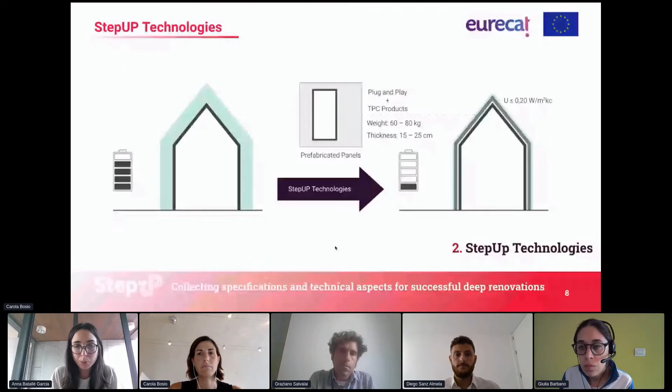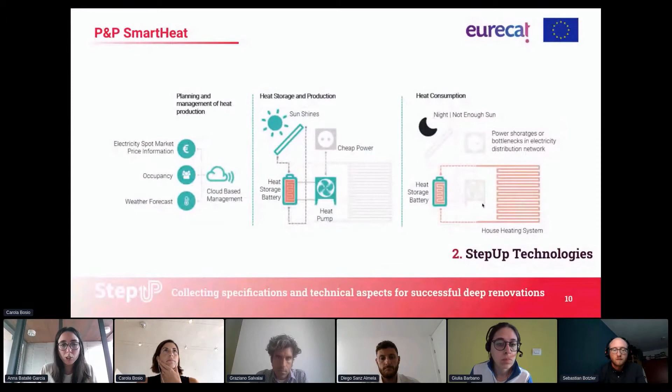So smart heat is a heat storage battery. What it does is store energy during the day when we can produce energy on site, and then it releases this energy when demand on energy consumption increases and there's no on-site production. In the following slide we can visualize a little bit what this storage looks like and how the PCMs are integrated within this storage.

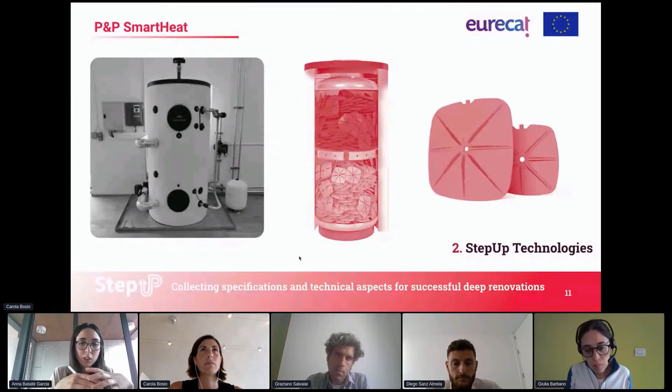So one of our goals is to provide a fully renovation package. In order to complement our main technologies, we need to collaborate with third-party technologies. For the passive technologies, this would mean having the external layer components, the windows and solar protections provided by third parties, as well as the PV and ST panels, the heating and cooling systems, and the demand control ventilation.

So what are StepUp principles? These principles need to work as a kind of guideline for the different technologies that are involved in the project for us, but also for the third-party technologies that are going to be involved in the project.

Sorry. Okay, no worries. Sorry, I don't know what happened. It's my fault. You reloaded. Yeah, in the principles. Yes, here. Sorry for that. Yeah.

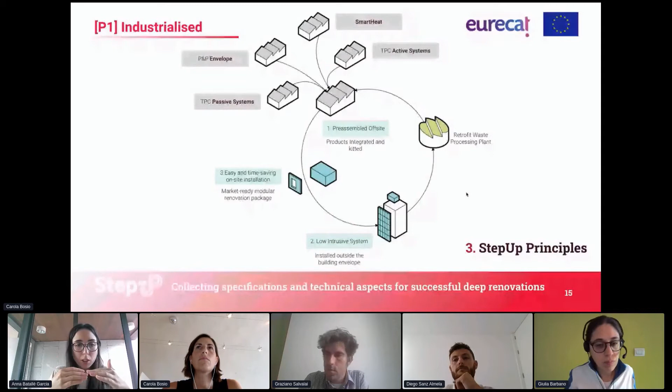So the first principle is that we want an industrialized solution. This means that the solutions need to be pre-assembled off-site in order to minimize the time on site, but also to reduce errors. Having the opportunity of these pre-assembled components will also reduce the impact or disruption we are causing to the users of the building. So it's important that we can prefabricate and have the solutions kitted before bringing them on site.

The solution also needs to be customized. It means that it needs to be able to adapt to different architectural geometries, so to different configurations of buildings, but also to different aesthetics. So we don't have a standard solution for renovation, but solutions that we can adapt and play with in terms of the aesthetics of the building and how it looks in terms of materiality, finishes, etc.

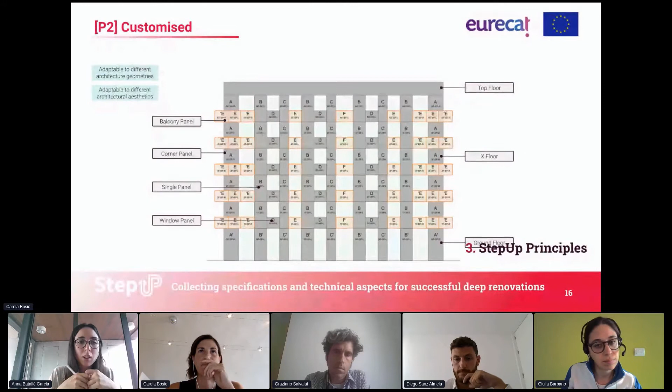Next, as I was mentioning before, it also needs to be compatible and interoperable. So the different technologies need to be able to engage with each other without having to apply major changes, to also ease the process of preparing the kits off-site before bringing them on site and reducing the time.

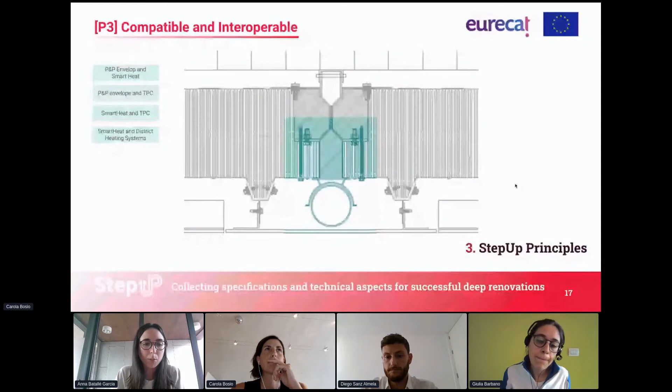We are also considering the impact that our technologies can have on the environment. So we are considering design for disassembly strategies and the impact of the solutions we are working with. So it's not only important the technical development, but also the sustainable benefit that this technology can bring to the market.

For open exchange of information, one of the things we consider most important for our methodologies is to be able to plan the different steps in order to make them efficient. To achieve that, we need to be able to exchange information easily, since there are different collaborators during this process. In order to efficiently exchange our information, we are trying to set up a kind of rule on which kind of information needs to be provided, in which format, etc.

And finally, all the technologies that we are developing need to meet EU regulations, but also in order to be able to understand the environmental impact, etc., we are also asking for environmental certificates.

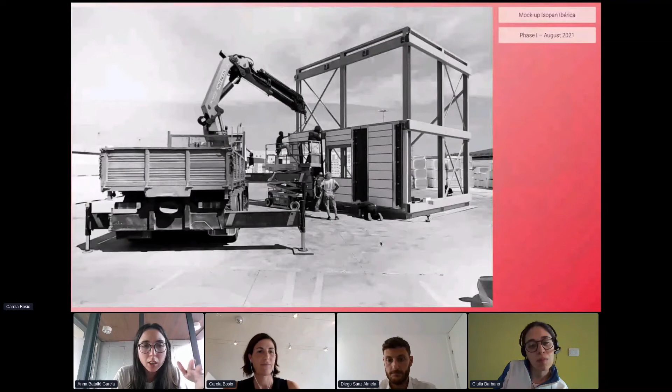Yeah, you have one minute. You tell me if I have to go to just the slide, move. Yeah, I think this is a collaboration. If you move to the next slide. It's better to, maybe do you want to? Yeah, well, this is what I've just said. So you can just move to almost the last one.

So it was mainly saying that we are trying to engage with this third-party cluster of companies, and what we are asking for is some kind of feedback on the process we are developing. What we are offering them is exposure, networking, visibility, the ability to test these technologies, and also to build a network for themselves with other innovation companies trying to change the renovation market.

And finally, in the last page, if you want more information, all the presentation is collected in a booklet that is in the description of the presentation, but you can also find it on our webpage, and you have our contacts there, etc., if you want to know more about it.

Okay, thanks. Maybe is there any question for the StepUp project?

Sorry, I'm looking at the refresh of your screen to see your paper. Okay.

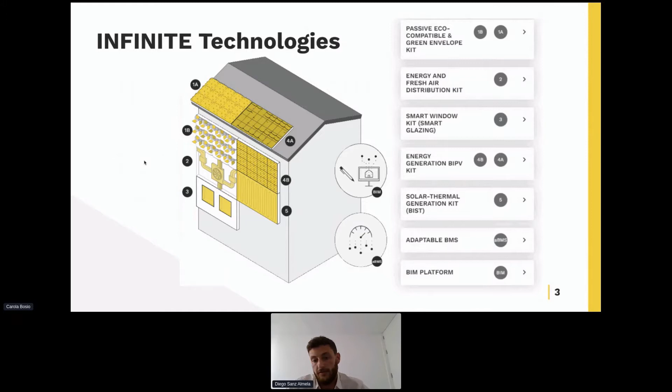So how does the need for this tool arise, and what's the starting point? The starting point is the lack of knowledge about the application of these prefabricated products or kits on the part of potential clients, or even technical staff sometimes. The key question is whether I can install such a system in my building or dwelling, and the next question is how much would it cost.

The tool addresses the first of these questions, as it tries to provide guidance on the suitability of installing one system or another, and to leave contact details in case you want to know the cost.

To obtain the parameters, the Delphi method was chosen, a process in which a series of experts converge to reach consensus on a common theme or problem. Once the objective was clear and the experts were selected—mainly different technical profiles within the technical partners of the project, such as technicians, research staff, and managers—the process followed was this.

A first round is carried out in which each expert points out the limiting parameters for his or her kit. The results are then pooled so everyone is aware of them, and finally a second round is proposed where parameters can be changed or new ones added based on the previous answers.

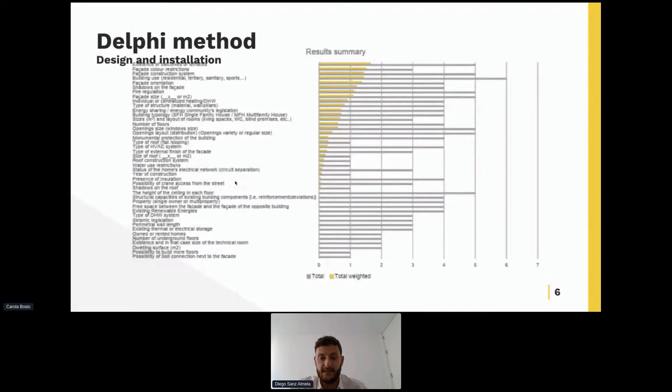For this reason, individual technical questionnaires were issued to each technical partner, in which, based on the results of the previous Delphi method, a series of questions were drawn up to narrow down which were the most limiting parameters for each kit, for each partner. The answers to these one-to-one questionnaires were the basis for the questions finally included in the decision-making tool.

Here's an example of some questions trying to find out, from the design and installation point of view, whether there is a minimum facade size to make the kit viable, for example.

The tool relies on certain limiting parameters to discard some of the kits. For instance, in the case where the sun does not shine directly on the facade, there will be 3 kits that cannot be used, as they need direct sunlight to work. So if we answer no, they automatically are no longer an option. On the other hand, if the answer is yes, all the kits continue to be viable, and so on until the end of the questionnaire.

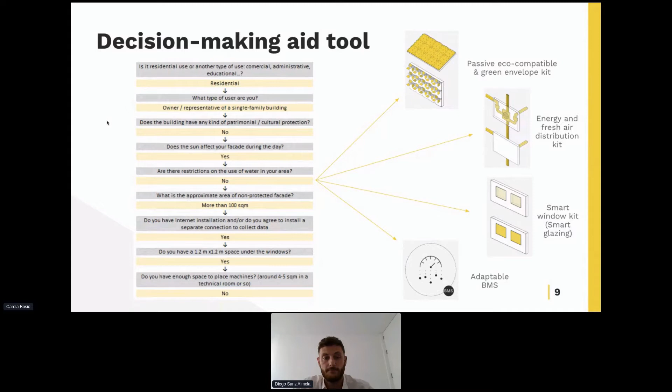As a real applied example of the tool, we have the case of the region of Valencia, where we have our main facilities, within the mechanism of the known one-stop shop, which has been very effective worldwide to achieve energy renovation. In combination with others, this tool is proposed to help in the decision-making process of energy renovation in general, to show advantages and disadvantages of all the available products in the wide range.

To achieve this, although we focus on demand, on the end users, there is a lot of prior work done analyzing the different types of building databases, different points of view, and so on, trying to see what the current offer is within the building sector nowadays. It's necessary to identify where the demand is to target the relevant actions to those areas or markets that we think are key.

This, for example, could be achieved through the creation of a GIS map, crossing demand and offer, but there are other possible lines of research to be developed from here in relation to the data obtained, like the definition of archetypes for energy modeling, which is maybe more common in other previous European projects, or even the improvement of existing national and European building-related databases. We can add more parameters to them.

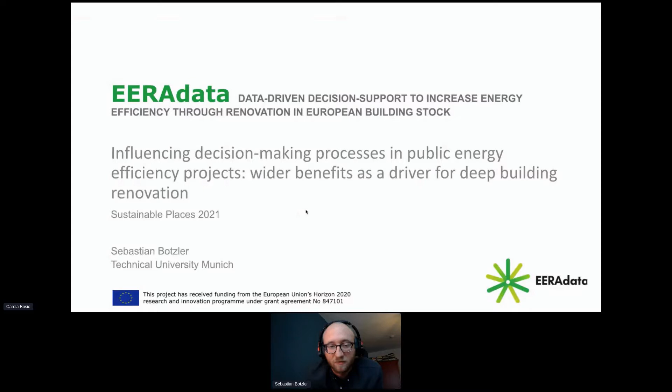Just briefly, the project parameters. The project was started in 2019, and we always had a very strong focus on practical implementation in mind. This is why we have 3 practical partners: the region of Andalusia, represented by the Andalusian Energy Agency, and the Colegio of Arquitectos in Malaga. Then we have the city of Copenhagen and the city of Velenje in Slovenia. Additionally, we are presented in 6 countries with 9 partners. There's research partners like the Danish Technical University, ITTI, programmers and data scientists from London Trilateral Research, and us in Germany.

But what is EERAdata about? I told you about the participating partners, but the outputs of EERAdata, we want to help municipalities and local governments like regions to assess their building stock, not only on the energy side, not only providing an energy audit, but with our software solution that we're preparing, we want to help them collect the right data to perform socioeconomic assessment and life cycle assessment on their buildings, which is quite a new topic. This is why we kept it quite superficial, but we want to give an insight on the potential of socioeconomic effects of building renovation.

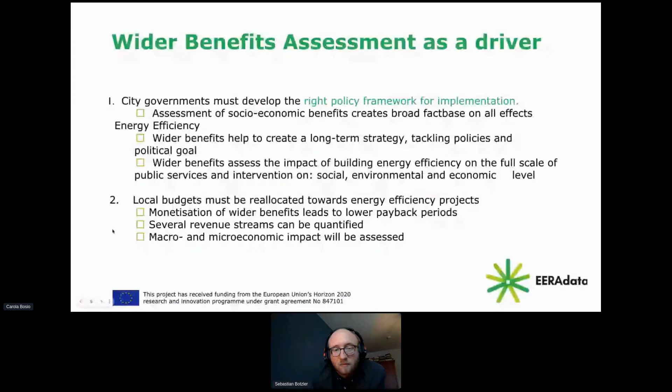Municipalities must increase their capacity, awareness, and knowledge of energy efficiency opportunities. What we want to try, with the wider benefit assessment, is to put knowledge about these extra effects into the minds and into the planning and processes of municipalities. This is why we chose this simple assessment approach - to raise awareness about what impacts energy efficiency and renovation has on buildings, on the municipality, and on the occupants of the buildings. And of course, municipalities must be aware of the opportunity energy efficiency represents.

And I think it's a huge opportunity, and our first results show this as well.

The challenges - and then we're done with the text-based slides - are that we don't have data for anything. It's really hard to collect the right data. The existing data is uncertain, and it's barely available on the local level.

It's very specific, for example regarding medical treatment - not data that a normal municipality or city has available. It's scattered across different department sources, and the lack of experience in planning and decision making in these fields is huge. Also, best practice examples are quite low - I know maybe five or six projects which take into account all these complex assessments. And there's no holistic software available yet, and no guidelines on how to properly assess these wider benefits.

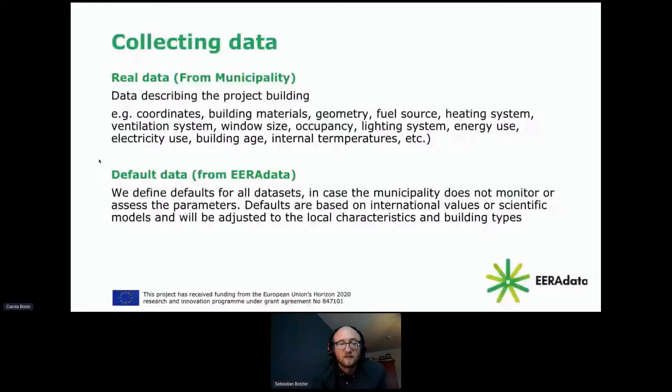What do we assess? We assess the energy demand and consumption calculation, based on the cubature of the building, the location, the heating system, and the cooling system. We assess the life cycle of the building, the embedded energy in the materials over the life cycle, and also the building technology life cycles, and what happens when we exchange it.

We assess the indoor climate, which currently works for schools only, where we simulate the impacts of building renovation on the indoor climate, and we monetize the productivity increase, the sick days of teachers and pupils, all these effects. And then we have the socioeconomic assessment, which quantifies and monetizes wider benefits like job creation or tax returns. I'll come to that later.

And then we have the supply side assessment, which is the counterpart. We want to see what it brings if we invest in supply, in energy generation, instead of energy efficiency. And we want to compare these two results to give an overview of the different benefits.

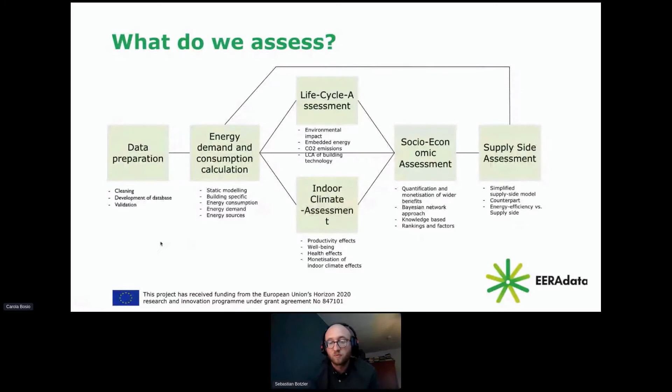The socioeconomic module, which I want to talk about in more detail, is basically a Bayesian network module, so it's probability based. There are no calculations and simulations happening - it's based on statistics and knowledge, and it's fed from the other calculation methods: the energy demand, consumption, life cycle assessment, and indoor climate module. It processes the outputs of the other modules and provides inputs and results to job creation, impact on GDP, for example, or CO2 emission targets.

So what is modeled in detail? We have the energy cost estimation - this is, I think, the most straightforward, so we see how much cost we save. This is already done in municipalities, but we want the holistic point of view, which is why we model this as well.

Then particulate matter emissions - how much PM10 emissions are reduced by the selected renovation measures. Then the CO2 cost assessment, where we go a bit broader and assess the CO2 tax costs available in most countries, then the emission trading costs, and we added the social CO2 costs with a very conservative number between 150 and 500 euros per ton, varying between the places where we perform the assessment.

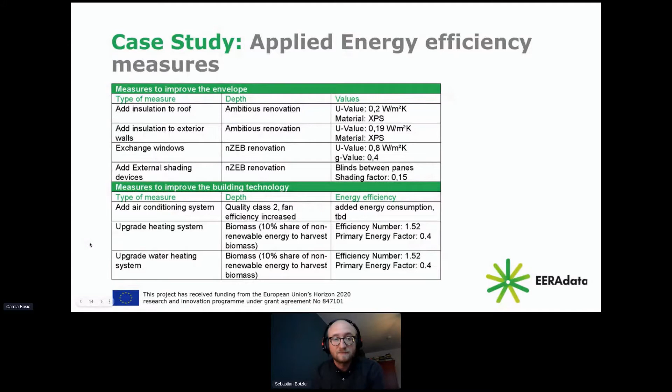Next one, please. You have one minute. That's perfect.

So next one, it's this one, the next one. I don't see it yet. Maybe the socioeconomic module. Yeah, sorry. It was a bit delayed here.

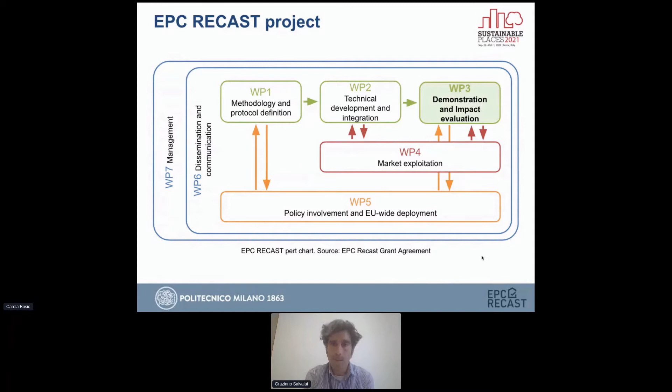The objective of our work packages, and also of this presentation, is how to define and test the strategies for the demonstration, define the KPIs for evaluating the demonstration, and develop required training material for the energy performance certificate assessor. This is very important because if we change rules or want to increase quality, we need to train the assessor.

Then test the next generation energy performance certificate in pilot. The demonstration is also always a very important action. We are introducing or demonstrating the next generation EPC in 6 European countries that are part of the consortium.

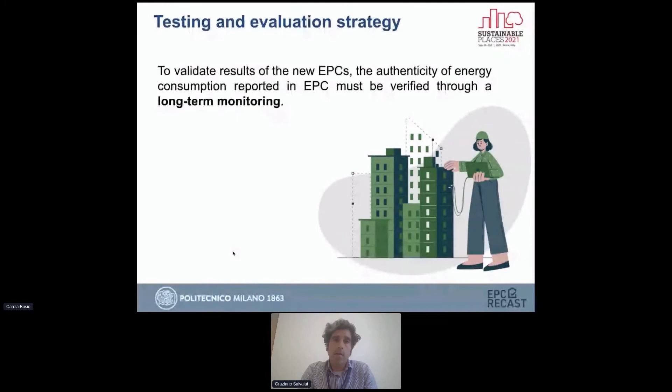The idea is to validate the results and compare the actual energy performance with the calculated one using long-term monitoring. Long-term monitoring is probably important to use in this case because it's a way to assess metrics that are influenced by variations in weather and occupant behavior, and also other operating conditions.

Instead of spot measurement and short-time measurement, long-time measurement is a way to have the big picture of the overall energy consumption and see how different factors can affect the real energy consumption in buildings.

Regarding the main steps of the monitoring and verification process, we are in the installation phase at the moment. We plan the monitoring, select the different demo buildings, and then send the installation and different sensors to the pilot countries and start the final installation. Then we will collect data to have this comparability of the actual and monitored energy performance.

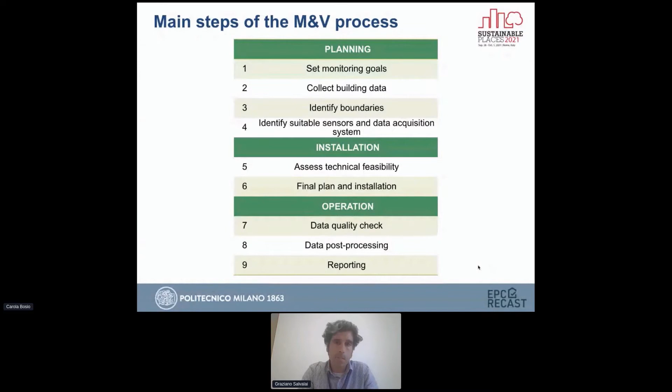So the planning is very, very important. According to what is required in the different member states for a compliant energy performance certificate, we need to collect the data, or better, what we need to monitor to verify the actual energy performance. So heating, cooling, domestic hot water, and electricity are the main energy vectors to be analyzed. And of course, we have different systems to take into account, since we are working in different countries with different technology, with different types of buildings. We need to plan as much as possible the different scenarios.

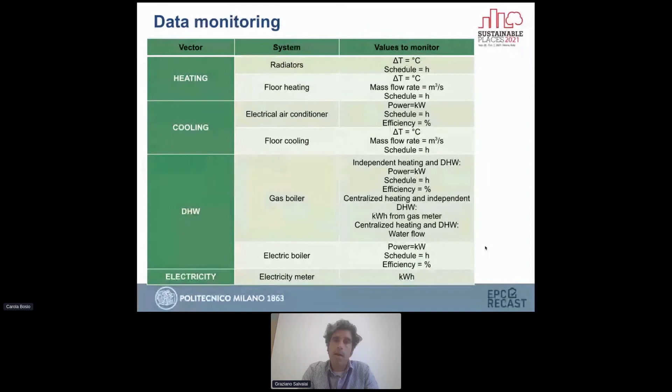So if you go to the next slide, the idea is to work with different levels of monitoring. We have buildings across Europe that were built 50 years ago. Some of them are pretty new, and we have different technology installed. Some buildings have analogic energy meters, some have digital. So the idea is to work with a basic level when thermal and electrical energy can be derived only from utility bills. We can have a medium level of monitoring when we mix metering and utility bills, and then we have to go to an advanced level in case we have multifamily buildings with centralized systems and so on.

If you go to the next, we try to represent and clusterize the 6 different building configurations that probably represent 95% of buildings across Europe. So we have configuration 1, for instance, where everything has a single counter. It's like a single family house where we have bills for electrical energy, for gas, for every energy vector basically we have in the house.

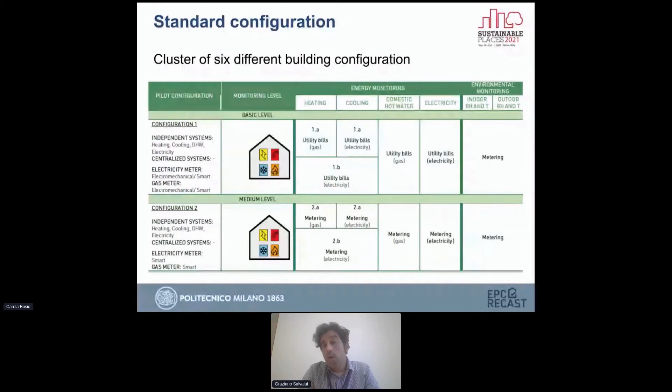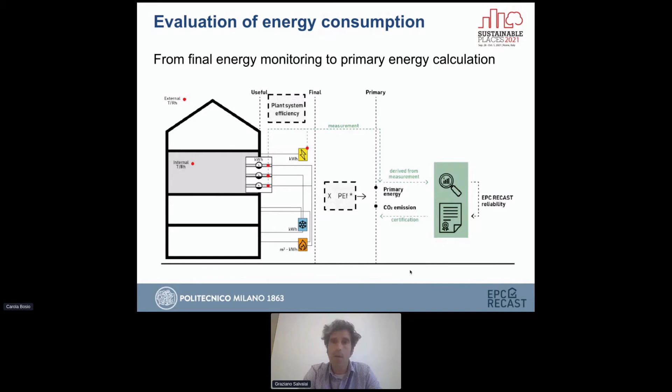If you go to the next, there are some pictures, very quickly, to see how the building is. It's very small in this case. We are going to install the system, and in this case the systems are centralized for heating, cooling, and domestic water. So the submetering here is important. The electricity is collected by a smart electrical meter.

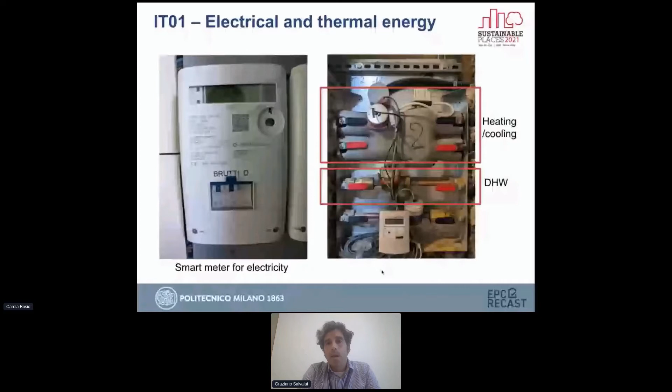The next one. So we are going to also select the proper configuration, and you can go to the next, we already see it. We are collecting also a sensor kit. The idea here is not to develop a new technical solution for monitoring, but to use a commercial, plug-and-play system to be delivered in the different countries, and then set up a robust and reliable system for collecting the data.

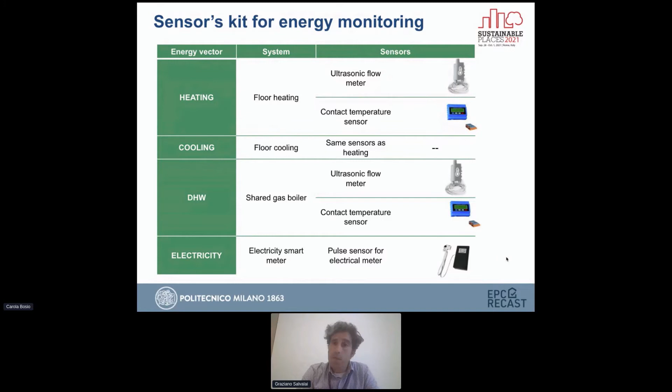If you go to the next, very important, and to the final one, of course, the very important here is to collect an architecture to have access to the data and use the data for post-processing, comparing it with what the energy assessor is doing during the energy performance certification production.

So thank you for your attention. If you have any questions, I'm here to give you some clarification. Thank you very much. Unfortunately, here now we don't have time for questions, but here is the contact, so you can send a question maybe after this session. Okay, of course, thank you.

Thank you. The next speaker is Giulia Barbano, if I'm correct. Yes, okay. Good afternoon, good evening everyone. Good evening, yeah, it's the right welcome. Okay. Yes, thank you Carola, I'll try to be very fast with this, do my best. So the presentation was quite long, you see, but we'll try to go through it fast.

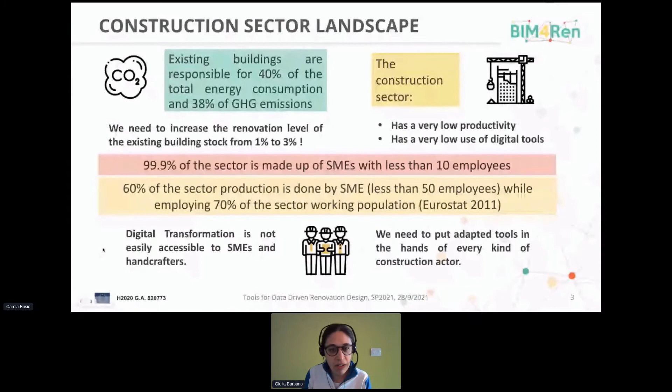One of the ideas here is to make the BIM revolution, the idea of having building information drive renovation, available throughout the construction value chain. If you go to the next slide, the core of the project is having workflows driven by digital solutions, with tools in a digital environment to backbone those workflows. They integrate them in a platform and pilot them. So this is the innovation context for the BIM4Ren project.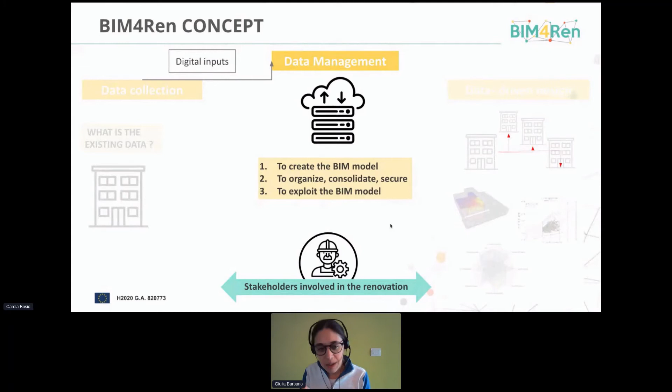Then the first question when looking at the concept of what the project focuses on is the data, first of all, that's the first step. But if you go to the next slide, how to manage this data - what we're going to focus on specifically in this presentation is data-driven design. So exploiting that data, assuming there's been some data collection and simplified ways of creating BIM models or geometries and information relevant for energy renovation, how can we support a data-driven design of renovation? This is what I'm going to talk about briefly today.

If you go to the next slide, yes. We're going to look at a few, not all, but a few representative examples of tools for data-driven renovation design that we are piloting in the project. Keep in mind these are quite research experimental tools, so it's a broad panel across very different stages, from diagnosis to design. The idea here is to guide the design from early concept all the way to detailed, considering multiple aspects of sustainability and allowing different levels of complexity. This is the high level objective we had within this activity of the BIM4Ren project.

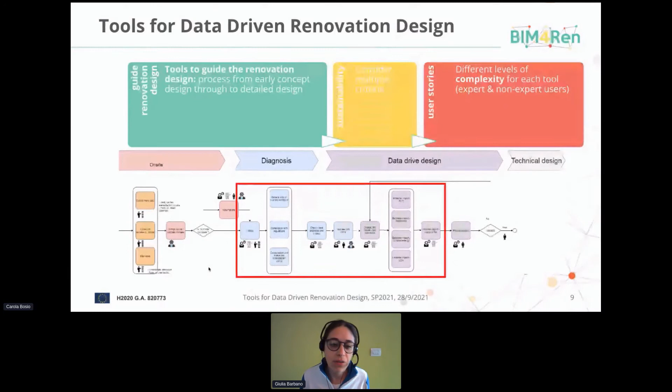So go to the next slide please. I'll show you the slice of the stack I'll be quickly presenting today: three tools for scenario evaluation developed - the 3B tool by Tecnalia, the Renovation Manager by NBK/INEF4, and the scenario comparison tool developed by ourselves at IES. Then one of the multiple tools for focused analysis, the BIM Solar tool developed by Enerbim, and then three tools for occupant feedback: the feedback tool by TNO, React by Vilnius Gediminas Technical University, and SMACH by EDF, Électricité de France.

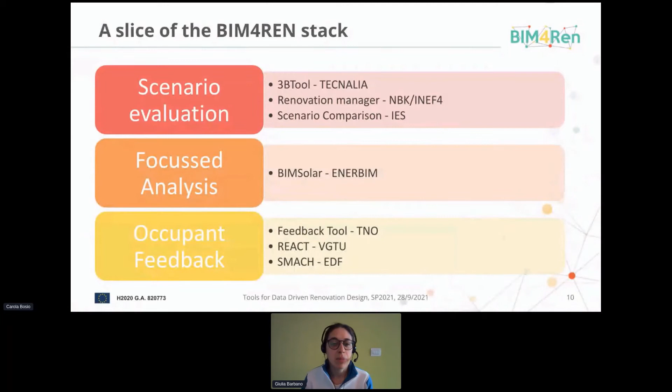The first one, the 3B tool, is a benchmark and best practice tool. It's intended to show indicative primary energy use of target buildings.

So here the idea is to get a sense of which renovation packages would be advisable for that building before even starting to work on it. This is based on pre-simulated models. It's a general public tool for end users who are not technical, and it's a web tool that covers a range of cases across Europe.

Then the next one, the Renovation Manager. This is instead a tool for building managers who are tracking the renovation process and starting to look within a portfolio at different renovations, what interventions are possible, what the catalogs are, and exploring the results on those high-level catalogs.

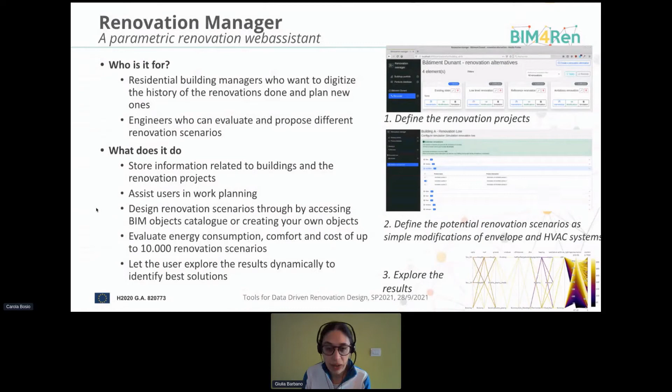The next one is the scenario comparison tool. Here we're starting to go closer to the buildings, looking at a 3D model of the area. Based on the scenarios identified before, you can run energy simulations on the buildings and do a before-and-after comparison, evaluating the cost and energy performance of different renovations to make a final decision.

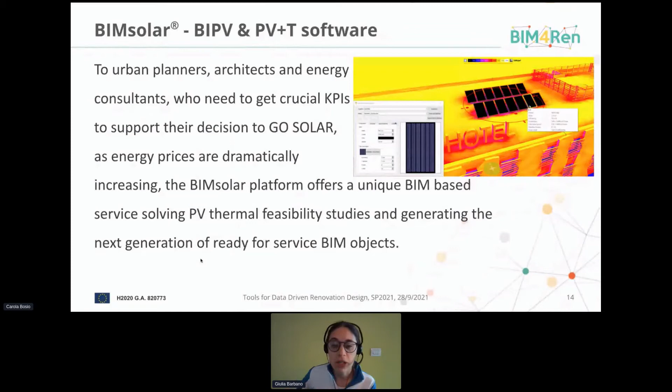Then we have the BIM Solar tool, which is specific to solar potential. This is a very timely topic right now with energy prices soaring. The focus of BIM Solar is to provide feasibility for PV and thermal feasibility on buildings, with objects that can be detailed more and more for the specific building. Then the feedback part of the stack, one of the tools is React.

React is a neuro-questionnaire system on the acceptance of renovation, used to analyze the quality of the building based on how end users who use a renovated building feel about the renovation.

Then if you go to the next one, it's SMACH, an occupant simulation tool for energy experts. It's meant to support the engagement of occupants in renovation and the promotion of efficient post-renovation behaviors. At the beginning of the renovation design, it can be used to assess the impact of user behavior on the efficiency of the project.

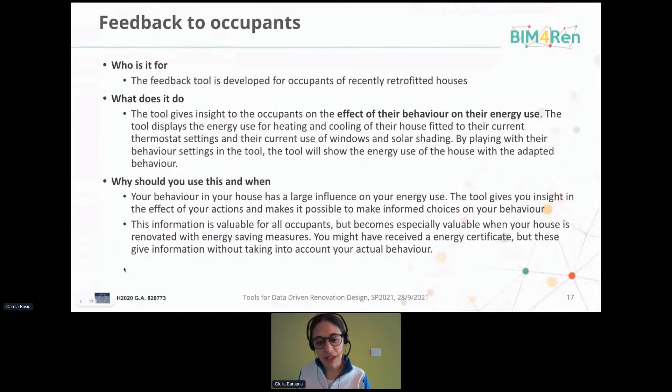For all of these, I just wanted to give you a very quick presentation. If you go to the next slide, I'd like to invite you to visit our YouTube channel, the BIM4Ren YouTube channel. There's a playlist of tool demos, roughly 5, 6, 7-minute videos for all of these, which will give you a short overview of the functionality and what the user can do. So this is just an invite to visit the website, the YouTube channel, go watch the demos, and then follow up with us for questions on the tools—we'd be happy to answer them.

Thank you. Congratulations, it's a very dense project.

It is indeed. We've used this approach of filming the demos as a way to not overwhelm the audience, but still be able to reach interested people who may want to look at different tools we're working on. How many pilots did you use in this project to validate all these tools?

We have 3 pilots, and we're testing a combination of tools on each of them—one pilot in Spain, one in Italy, and one in France.

Is there any question from the audience? Don't be shy.

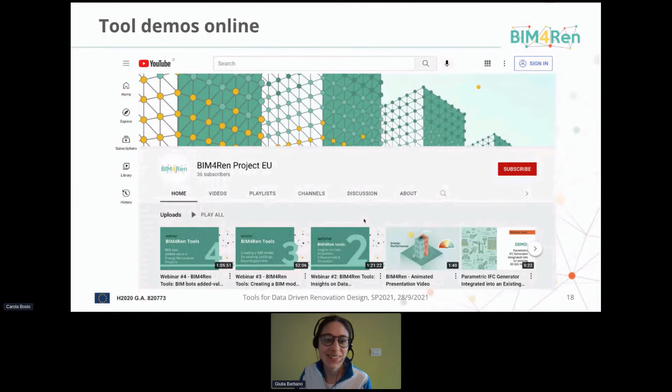Maybe in the next slide there is your contact for any question.

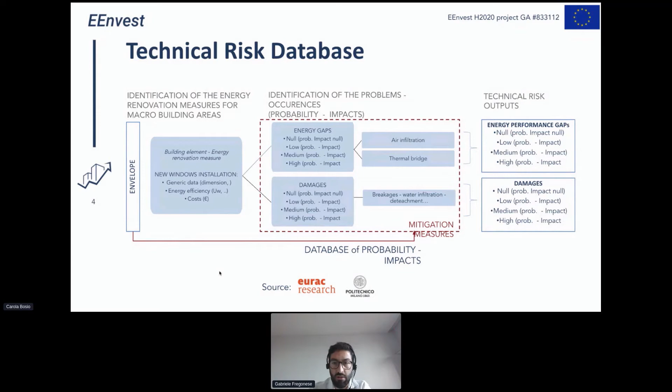As you can see, we have tried to go into as much detail as possible, splitting each type of energy conservation measure into components, such as new windows, wall insulation, etc. For each one, we have tried to define the probability and impact of possible negative outcomes, such as air infiltration on new windows or thermal bridge in new builds or wall insulation.

Combining them together through Monte Carlo simulation, we can assess the probability and impact of what we call the energy performance gap and damage. This depends on the input provided by the user and the type of renovation. In particular, if you have certification, there are correction factors that can lower your risks. So if your renovation project is LEED certified or Climate House certified, you can lower your expected risk.

Then, once we have defined the probability distribution of technical risks, and the expected energy gap and expected energy damage in terms of probability distribution, we put that information into the financial risk model, combining this distribution with other inputs.

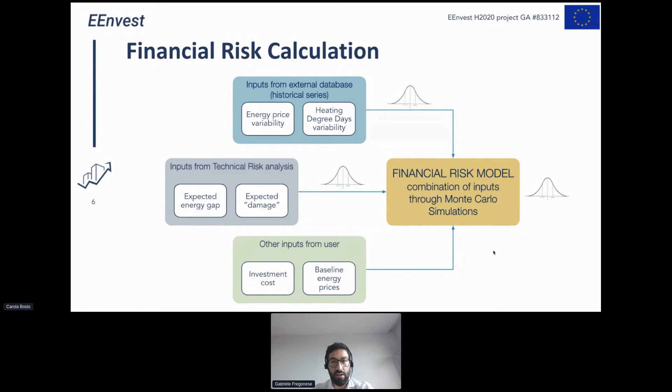The financial risk calculation process is split into 3 phases: pre-processing, where we are adjusting the input data; processing, where we do the Monte Carlo simulation; and post-processing, where we take the outputs of the Monte Carlo simulations and do further analysis to obtain the specific KPIs we are most interested in seeing.

In the pre-processing phase, we are converting and preparing the data to be inputted into the simulation. Starting from the distribution of expected damage, which is represented from the technical risk analysis in terms of percentage of investment and in terms of something per square meter, since it's parametric, we have to convert it so it can be used together and combined with other units of measure.

Same thing for the expected energy gap. We take the historical series for energy prices from external databases, and the same for the climate factor and the assessment of heating degree days.

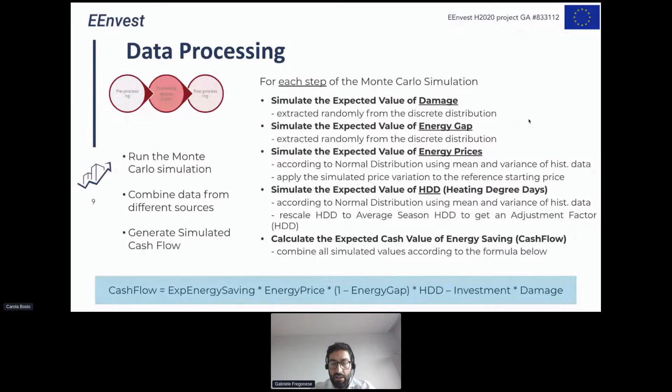After we have the probability distribution of the cash flow, the revenues of the economic saving, we can calculate the probability distribution of the payback time, just dividing the investment cost by that number, or the probability distribution of the project IRR, the NPV, the equity IRR, or even, if we have the financial structure of the investment, the probability distribution of the DSCR, which is a bankability indicator that tells you how much the project is able to pay back a loan.

In the post-processing analysis, we can calculate further indicators such as the value at risk. This is a more advanced indicator, more interesting for financial institutions such as banks, that tells you how much you are likely to lose if things go really bad, with let's say 95% probability. So in that case, you can say that with 95% probability, you are expecting your IRR to be no lower than 7%, for example. This is very important for a financier of the project.

This is one of the outcomes that you can find from this platform, this tool. You see in the graph the probability distribution of the project IRR over a different time horizon.

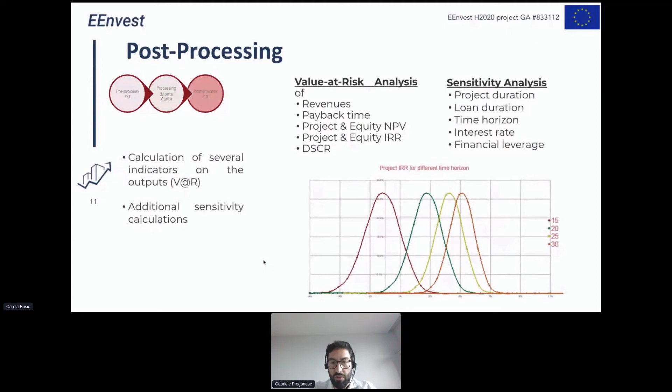Finally, you can also use this model to calculate the probability distribution of your financial indicators according to different contractual models. You can see from the orange curve that your probability distribution, without considering the technical risks, so only considering the climate risk and the energy price risk, is around 13% with a very narrow probability distribution.

While if you are considering all risks including technical risk, then you are in the blue curve. Your expected value is almost the same, slightly lower, but your probability distribution is much more concentrated on the left tail, meaning that if you're bearing the technical risk, you are bearing the risk of your IRR being on the left side of this curve.

While if you're hedging the technical risks, such as by entering an energy performance contract, you are only bearing the energy price and climate risks. So overall, your expected mean value may be lower, but you're locking your probability distribution to a much narrower value. That's all, next slide please.

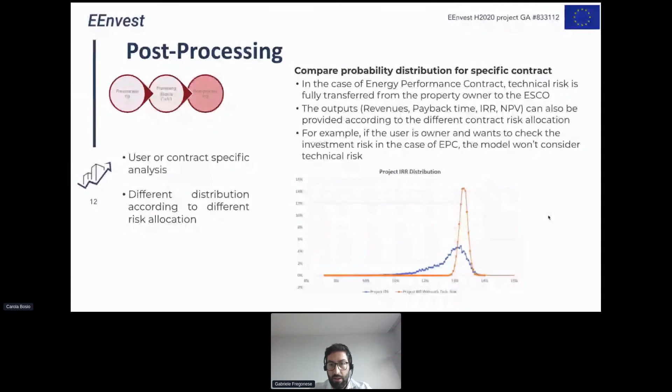I think, yes, just the conclusions. We have more details in the paper about how this works. These models have been tested on a specific case study building located in Rome, but we have also done some simulation on 12 other buildings, and it seems to be working.

We will be hosting a workshop in late October or November, targeting financial institutions to present the details of the model. So if anyone is interested, you can join to provide us feedback, because this is still a prototype under implementation by IAS on a web platform. We are still open to receiving feedback from the public, specifically from financial institutions, with the objective of going live in late 2022.

Very interesting, thanks. My colleague Regis has a question: do you consider those multi-benefits in an EPC business model?

For instance, comfort? Not yet. Actually, there are some models that have been studied also in Horizon 2020 projects, where they are basing the EPC on comfort indicators, on comfort KPIs. Now we are struggling in assessing the probability distribution of multi-benefits, since there is no unique methodology to assess them.

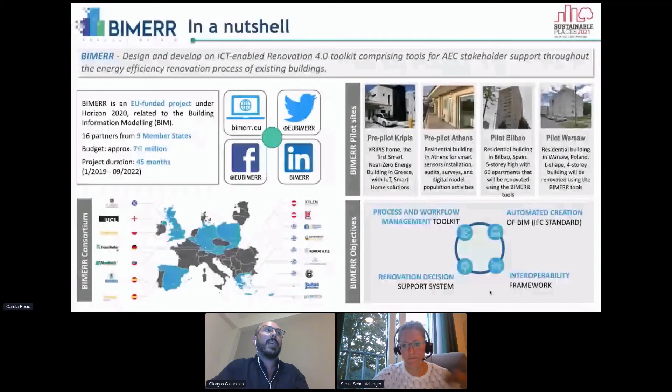The second objective is the development and delivery of a renovation decision support system, where we run different simulations to evaluate potential renovation scenarios beforehand, without being applied in reality. The third objective is about the development and delivery of a tool set that supports the workers and residents during the actual renovation works. Last but not least, we have the core of the project, the interoperability framework, which is the common data environment of the project, where all the tools can upload and consume data seamlessly.

Next slide please. So, as I mentioned before, for each of these objectives we have different building blocks and tool sets. Moving from the BIMERR concept to the BIMERR solution development and delivery, you see from left to right that each of these building blocks consists of many components that work collaboratively to deliver the scope.

Next slide please. I don't have time to present all these components, but what I tried to do here was pick some screenshots from the interfaces of all these components and put them around the conceptual architecture of our solution. I cannot present each and every tool in detail, but you could visit our website to see further details for each component.

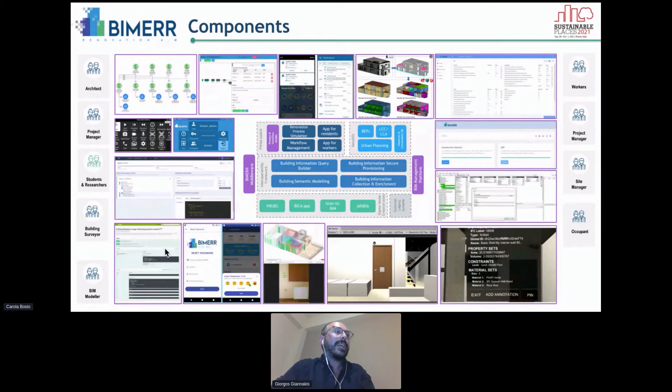One more, sorry for the animations. Okay great, I hope it's the good one. The previous one? The previous one. Okay yes, great, okay.

Just to emphasize that this talk is mostly about the first phase of a renovation project, where we are collecting information of the building and then perform the renovation simulations to evaluate current renovation measures to be applied in the buildings.

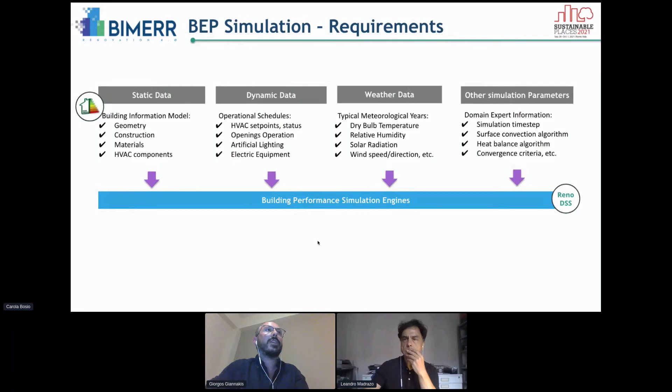Emphasizing on that part, how we perform the renovation evaluation and energy performance simulations - there are very specific requirements to perform detailed energy performance simulations, and these data requirements fall under four main categories: collection of static data about geometry, construction, materials, and HVAC components; dynamic data, which is information about how the controllable elements of the buildings operate; weather data about the climate conditions of where the building is located; and finally other simulation parameters, which require domain expertise, information about specific algorithms, convergence criteria, and so on.

The way to collect the weather data and the other simulation parameters is straightforward. But the obstacle to collect and meet all the simulation requirements is how we collect the static data and dynamic data.

The current practice of collecting static data is to collect this information from scratch, which is a time-consuming process and often requires more time than is available within project deadlines. Apart from that, this data collection also needs transformation, to convert the information collected into input data format files readable by simulation engines.

With regards to dynamic data, the limitation many projects face right now is that the way dynamic data is incorporated into simulation engines is oversimplified, using either deterministic or predefined rule-based schedules, which results in a gap between the measured and simulated energy performance of the buildings.

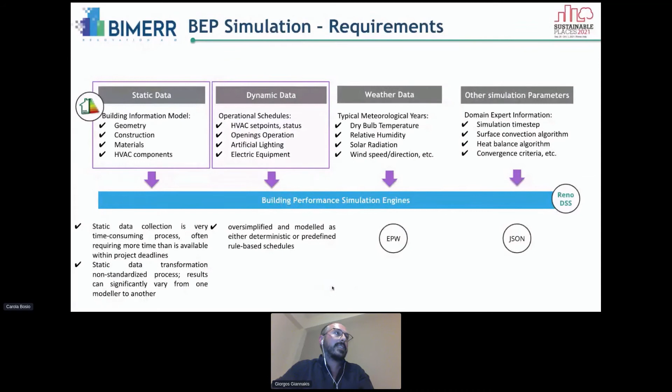BIMERR aims to provide a solution to these limitations, and it develops and delivers tools that automate the collection of static data and dynamic data.

For the static data, we have developed components where we automatically create the BIM model, and for the dynamic data, we have developed tools that transform and consume information that comes from IoT data, train models, and define new methods and models that can be used to reduce the gap I was referring to before.

So starting with the static data, the first tool applied and developed in the context of BIMERR is the Scan2BIM, where Scan2BIM is a tool set that requires as input the 3D laser scanning results, interior and exterior of the building, and some photographies. And the output is a building information model that includes information about the geometry and MEP components.

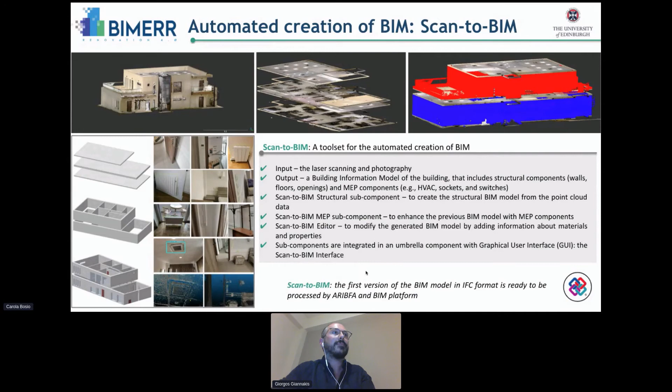Which is ready to be processed by other components. And although the BIM model is in IFC, an open BIM standard format file, we need to check if the resulted IFC file is complete, consistent, and correct, so as to be straightforwardly used by the renovation decision support system.

To do so, we have the BIM management platform, a web application that allows you to upload the resulted IFC file, perform some checks, and in case errors are detected, you can visualize them through a 3D viewer that it includes, but also provide a report error file back to the Scan to BIM to perform the modifications.

So we're talking about an iterative process between the Scan to BIM and the BIM management platform. After having an error-free file, the IFC and the BIM model is ready to be processed by the renovation decision support system. So far we have prepared and dealt with the static data of the building.

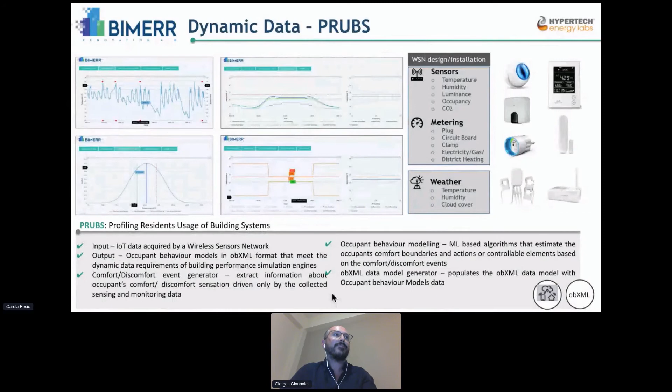Next slide, please. You have one minute. Yes, I'm pretty close to the end. So we have talked about the static data, the dynamic data, weather data, and...

...the other simulation parameters. So we have all the data required to perform some renovation scenarios evaluation. For that purpose, we have developed the renovation decision support system, a web-based system, which requires as input the BIM model, but also the obXML, and then performs some simulations.

To perform the simulations, it automatically generates candidate renovation measures and renovation scenarios, which are combinations of renovation measures, and calculates some KPIs: energy KPIs, LCC, LCA KPIs, and urban planning KPIs.

All these results can be viewed by the user, and the user can select the renovation scenario that meets his or her requirements. By selecting this specific renovation scenario, he or she can download the BIM model that includes all the measures applied for the renovation of the building, but also download a report PDF file including further details about what this renovation scenario includes.

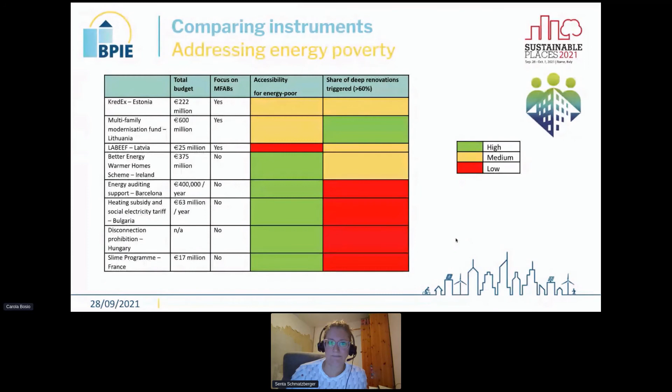The issues we identified when we compared these financial instruments was that structural improvement to renovation needs investment from the building owners or an increase in the monthly costs. So either one-time investment or increased monthly costs, which of course they need help with. It needs a broader scope.

Energy poor households need to be targeted more broadly, and there should be a 100% grant program. 100% of the cost should be granted, not only parts, because energy poor households obviously can often not bring up any of the money that they need.

What we saw from these instruments that were tailored to energy poor people specifically was that they had very low budget, so that's why they don't trigger deep renovation. They treat mostly the symptoms of energy poverty, not its cause, which is the badly performing building, and they don't focus mostly on multifamily buildings.

Because especially with these owner-occupied buildings that we see often in Central and Eastern Europe, the owner structures are difficult. There are energy poor owners next to not energy poor owners. Everybody has different financial means, everybody has different interests, and therefore it is very difficult to trigger this. We are hoping with our resource centers that we can somehow overcome these differences through information and advice.

Okay, only one second, because I downloaded the slide from my email. So just one second, please. One second, sorry. We didn't have the last version, so I just have to download it. Oh, okay, my downloading is very slow. I'm sorry, I have some issue with the presentation. Because I imagine this is not the right one, isn't it?

Leandro, we can't hear you. You are muted. You are muted, we can't hear you. I'm sorry. I'm not muted. Ah, I saw you muted. I try to act somehow, but don't know. Oh, okay. In the meantime, my PowerPoint reacted, so it's good, at least. But I can't hear you. I don't know why. Yes.

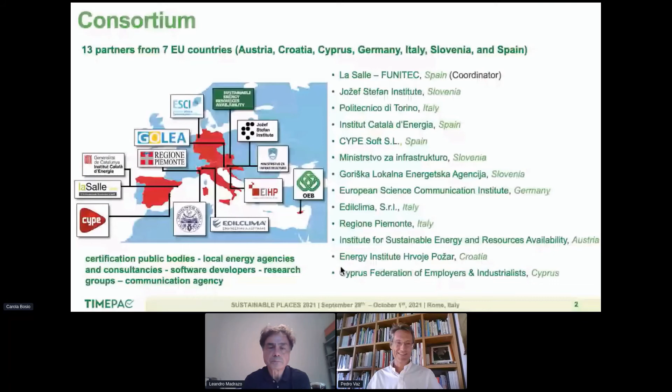The objectives of the project are summarized in the next slide. We want to contribute to move from a single static certification to a more holistic and dynamic one, by seeing buildings as part of a built environment, and also as dynamic entities that are continuously changing over time. Our project focuses mostly on data generated through the whole life cycle of the building, and also the life cycle of the EPCs, which I can explain in the next slides.

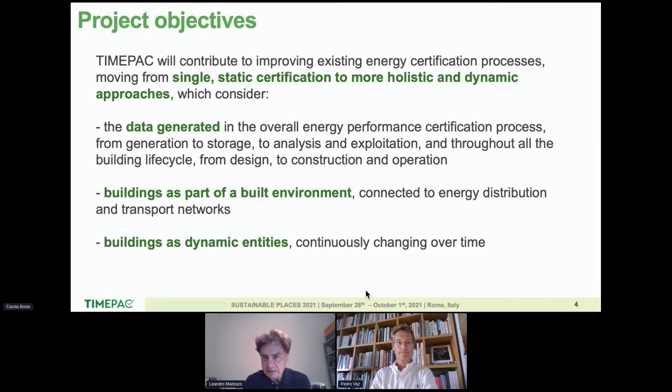We also need repositories that are collecting this data. We also need procedures and tools to analyze these repositories of EPC data. And we need services to exploit this analyzed data.

So each one of these stages requires better inputs, better data, but also what is preventing or hindering the continuous data flow are the connections between these stages. So we need to improve the connection between the generation and the storage.

We also need to develop more powerful tools to analyze the contents of the EPC repositories. And we need innovative services to exploit and get benefit from the enhanced EPCs, to make them a valuable tool for building renovation, for example.

Summarizing these objectives: the specific objectives for the project are to increase the quality and reliability of EPC schemes.

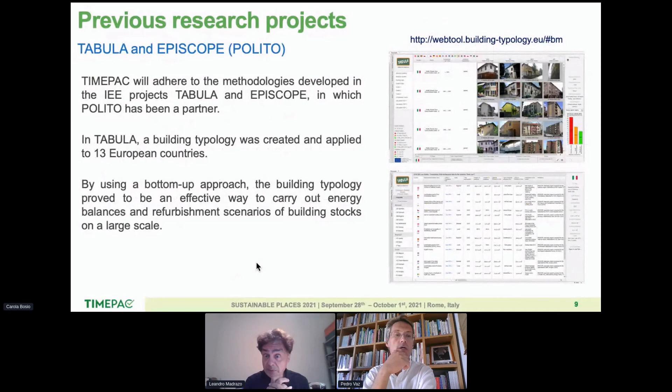Number 3, creating building renovation passports with data repositories. Number 4, integration of smart readiness indicators with EPC. And number 5, large-scale statistical analysis.

All of these scenarios integrate actors, data, and processes from the different countries involved. So we wanted to overcome this limitation of pilot and country. And these transversal deployment scenarios indeed involve all the countries that are participating in the project.

Because what we want is to reinforce the cooperation and get, as a result of this project, some methods and tools that can be applied not only in these 6 countries, but also in other countries in Europe. And that's the output we want to achieve.

For creating these transversal deployment scenarios, we will use the distributed data in different repositories available in the different countries. In the next slide, I will explain in more detail what is the transversal deployment scenario and how it is related to other scenarios.

So the transversal deployment scenarios, these 5 that I have named, are connected to the demonstration scenarios that come afterwards, in which we will try to prove that all of these processes that we want to test and develop in the deployment scenarios can be applied in real cases with external actors.

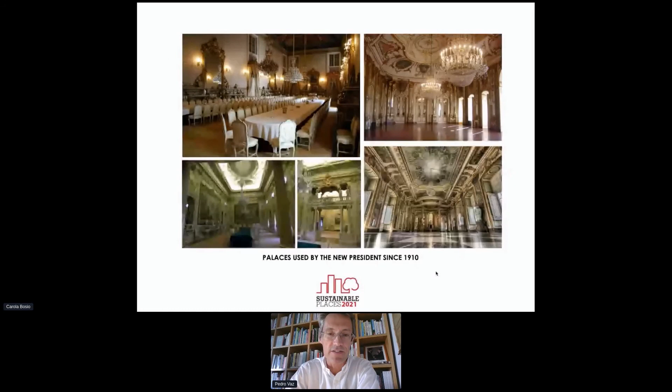But for the presidency, it was decided that two small, modest palaces would become for the use of the president. One is in Belém, this is the presidential palace. And the other one in Cascais, the one I'm presenting, is something like a summer palace for the president.

And in Cascais, because Cascais is something like a romantic area facing the sea.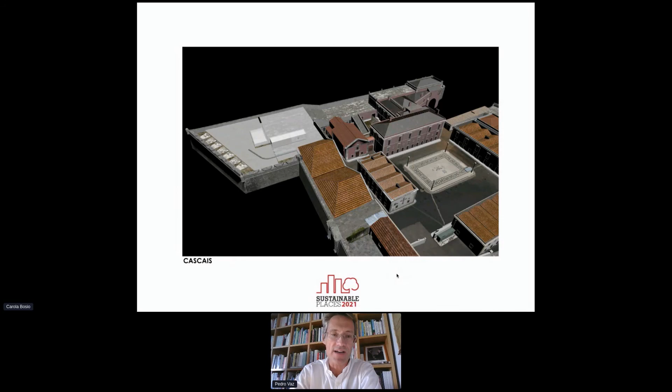And the presidential palace is located inside a fortress, and it's that rose building we are looking at, with that terrace over the walls.

All the intervention was something like a light cleaning on the inside, removing all the dust, with small demolitions and some new additions in order to have a new program installed. Again, the same: the additions in red and the things demolished in yellow, as usual.

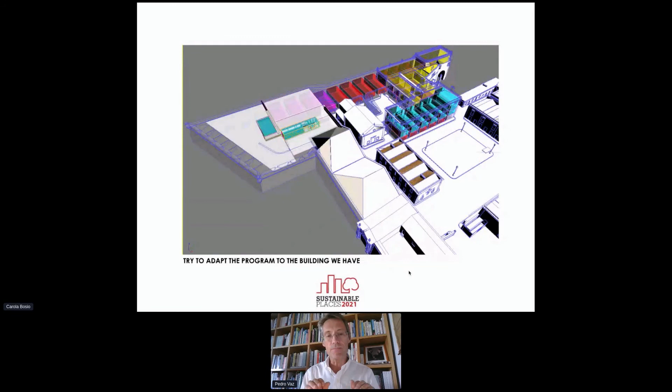These are some of the elevations and sections. Here we can see that the program was structured to be put inside the existing spaces, trying to find the most suitable function for each place according to the nature of the place.

Because finding the right use for each of these spaces is something like half of a good project done. And in the end, the result is this one: the building is the yellow one that you see, the small one in white that is facing the sea, and the area of the garden with the swimming pool.

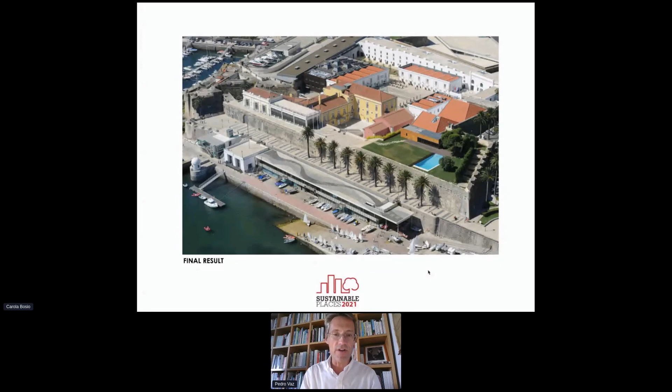We began the intervention, removed all the tiles, and installed thermic isolation and waterproof protection, and a new bridge was designed to reach the terrace.

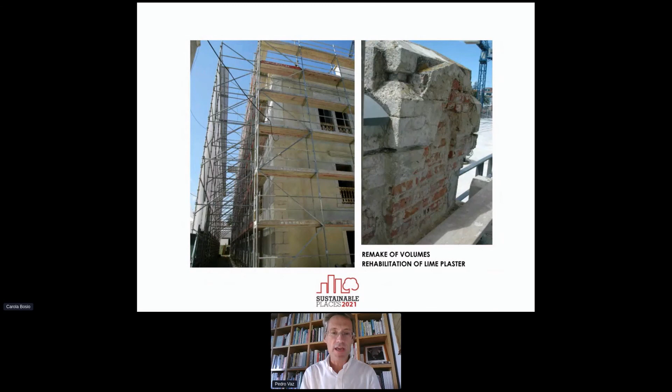All the lime plaster volumes and modulations of the facades were redone in lime plaster, of course. We looked for the original color and found that it was yellow in the beginning, so we came back to the yellow.

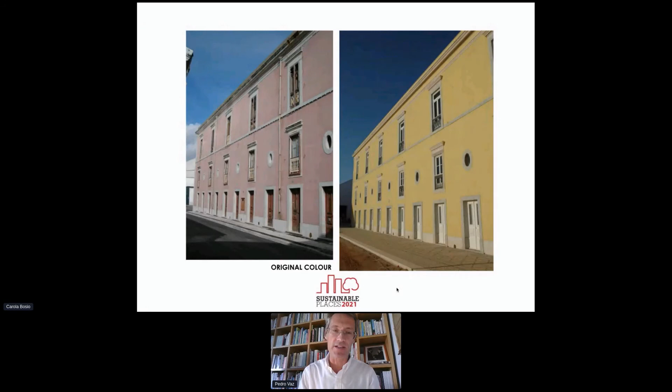With some lighting for night and evening events, of course.

Above the walls of the fortress, all the stones were removed and some waterproof canvas was installed to prevent the water from coming in, into these areas that were underneath the walls, and that became something like an exposition area.

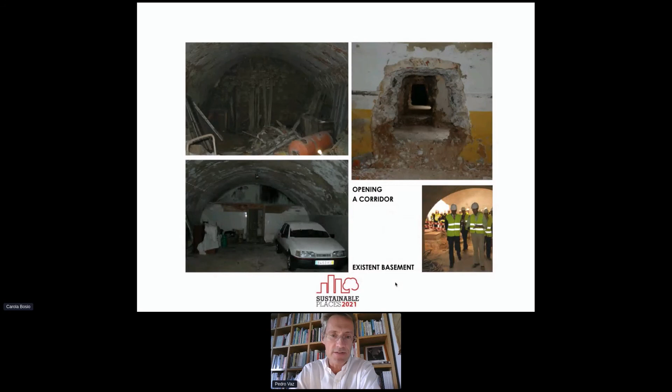As we can see here, they were all isolated areas and they were all connected in order to make an exposition area.

The big room that was made in 1936 in concrete had the floor removed in order to put the air conditioning on the ground with the machines underneath.

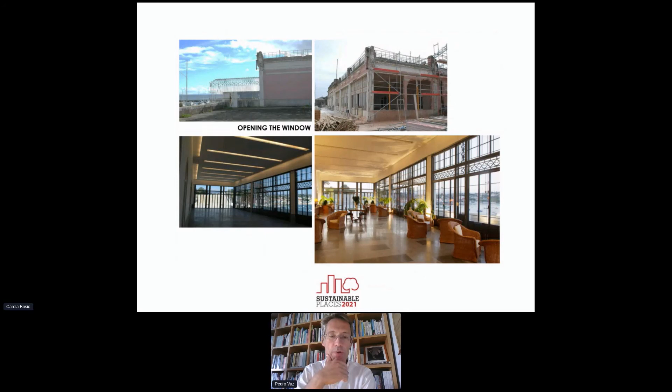And the wall that was on the edge of the room was opened in order to have the open view to the harbor of Cascais.

On the terrace was made an area with a garden and with a house in the garden that was covering the exterior units of the air conditioning.

Some of the corridors of the military structure were redone with a contemporary design because they were lost, and they were redone.

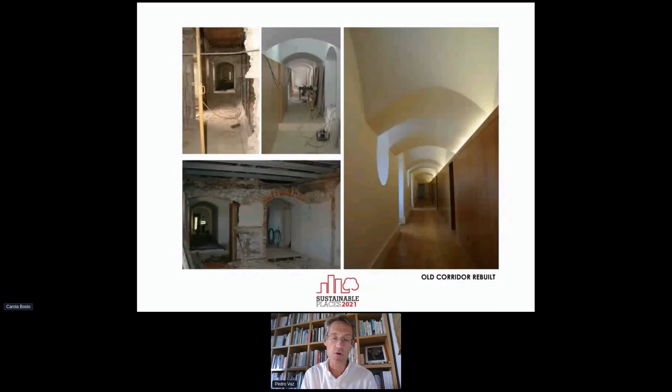Some new bathrooms were designed in order to serve the big saloons, the protocol areas.

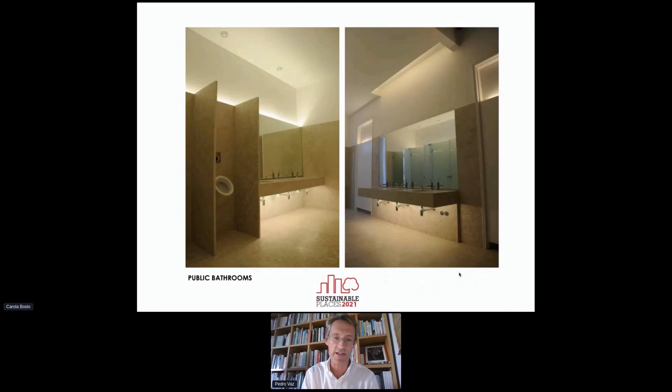These areas were restored where they needed it. There was a restoration work. Something like in this room, it was all in wood, and it was restoration work.

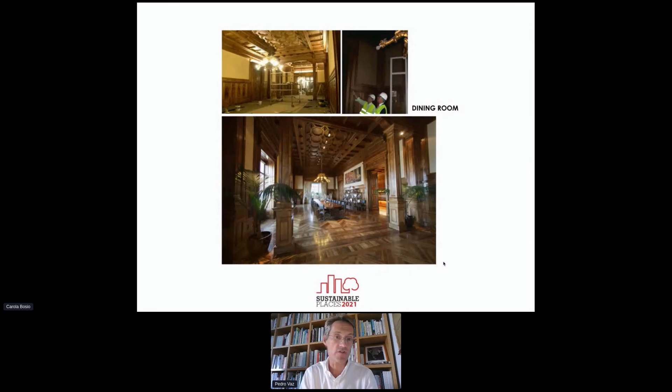All the interiors, we looked for the original colors, and we tried to repaint the areas with the original colors. Again, the same, some images of the interior at the end of the works.

And we had a chapel next to the palace that was all painted with enamel painting, and the major work was something like the restoration. We had to undo what had been done in the past, removing all the painting and discovering again all the faked stone that was underneath the painting.

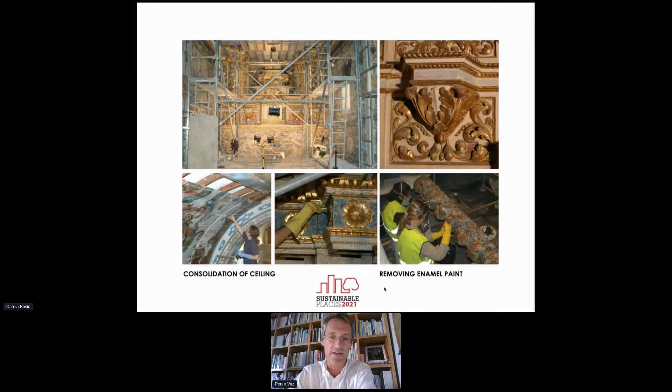And so the chapel in the end became with this look. And because the altar and the pulpit and all the chalice and the pyx and the patens were lost, we designed new ones in order to give mass again, and that is already working again.

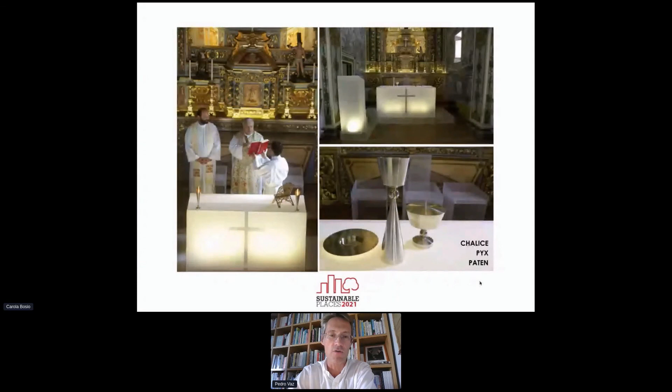Thank you very much. Thank you for sharing this beautiful project. Amazing. Thank you.